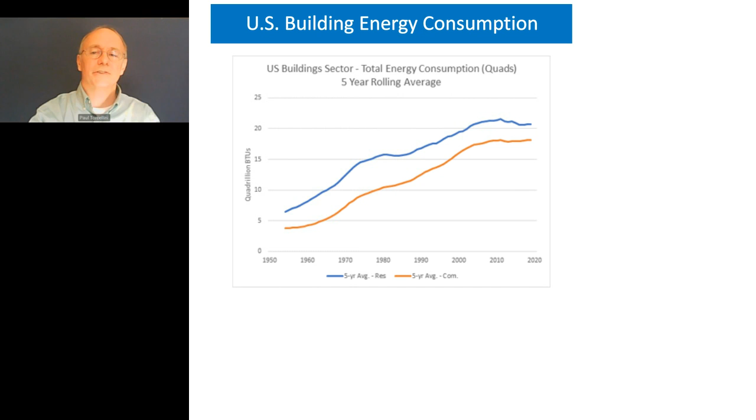On the screen now is a graph from EIA showing the trend in how energy consumption is changing. Yes, it's leveled off. It went down for a couple of years, and now the rolling average, it's hard to tell, but maybe it's going up a little bit. With the events of the last year, we'll probably see a decrease, especially on the commercial side, going into next year. But whether it's going up or down, the point is it's still a lot of energy, and it's not a strong downward signal. So we're building buildings at about the same rate that we're saving that energy.

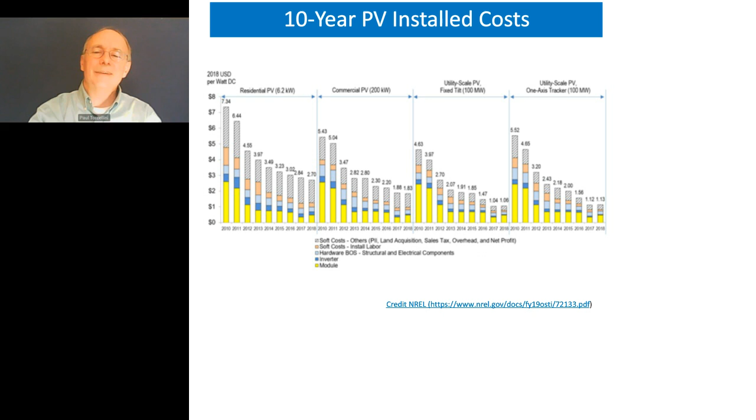Another thing that has changed dramatically is the cost of photovoltaics as installed values. On screen here are different costs for residential, commercial, and utility-scale PV. You can see a dramatic decrease, something like 25 to 30% of the cost today compared with 10 years ago. That's really changing the landscape around renewable resources available to buildings. When I started thinking about this 25 or so years ago, putting renewables on a building was cost prohibitive. A few people did it, especially if grid independent, but really you couldn't afford to. Today it's readily available, and that market is increasing pretty dramatically.

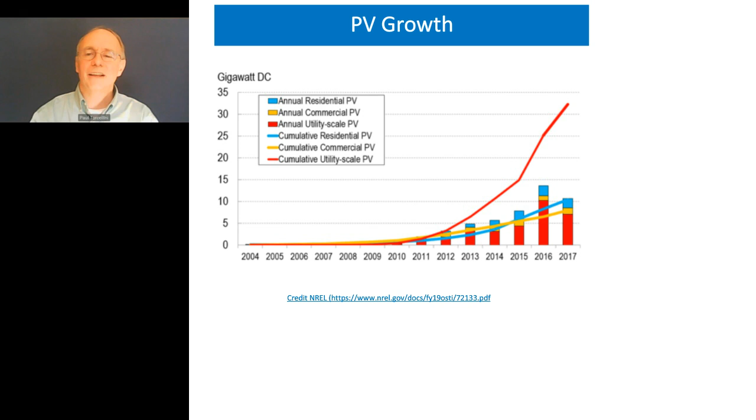This kind of hockey stick curve shows that growth, especially on the utility scale, but the growth is pretty good on the residential and commercial scales as well.

A couple other things to think about in terms of how buildings and the grid interrelate: the utility grid has been around for a long time, not quite as long as buildings, but has certainly been designed around meeting the loads of those buildings. Again, 70% of electricity today is going into buildings. And yet that capacity factor of the grid is decreasing, so there's less alignment between the load and existing generation compared with when we actually need that building.

We're seeing that especially in the late afternoons. I'm sure there are other sessions talking about the grid shape and how it's responding, but if you end up with a late afternoon grid peak, you're looking at how to meet that. A lot of times it's been with some kind of gas turbine or gas technology to meet that afternoon peak, or we need to really think about mass amounts of storage to meet that.

Backing up a little bit, when we talk about energy and measure it, energy is one of the few things we can readily measure at the building boundary, but it's long been a surrogate for environmental impact. That environmental impact focus has shifted a bit with time. Initially it was a lot about water and air quality, mercury, sulfur, nuclear waste, habitat destruction. More recently, a lot of discussion around carbon emissions. All these things get tied back to energy because that's really the only thing we can measure as it's crossing the boundary.

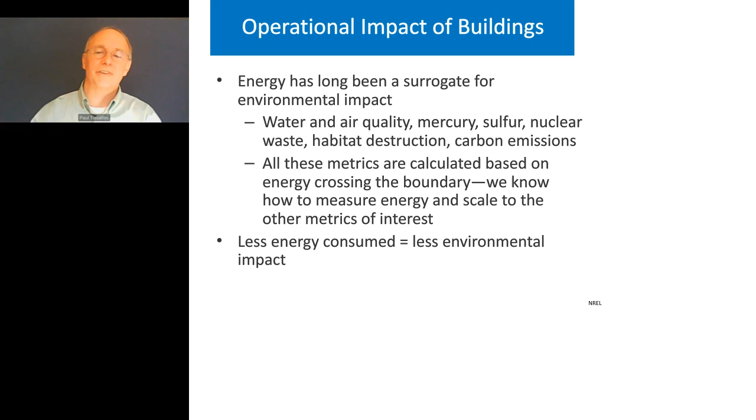So kind of the overall premise, which has been understood over long periods of time, is that if we consume less energy, then there is less impact on all of these metrics. So really the objective here is: how do we reduce that impact?

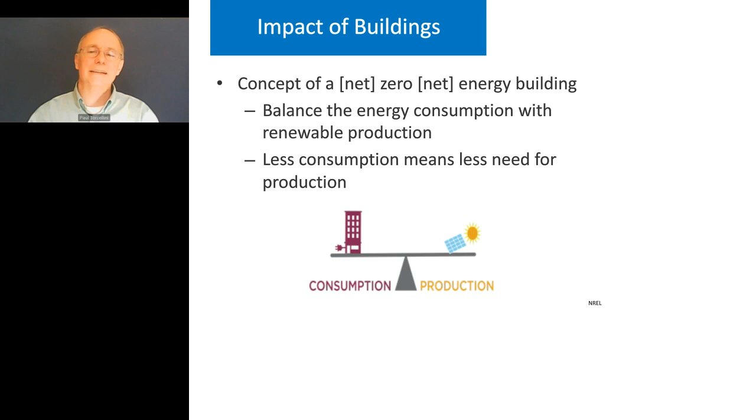That fundamentally is the concept of — and I stuck a couple different nets in here, if you want to have an entire informal session, we could probably have one just on where does the word 'net' go, or does it go at all — but the concept of zero net energy buildings is really about balancing consumption with production. If we have less consumption, that really means we can make that balance easier with less production.

Early on, when we were talking about zero energy buildings, we did a feasibility study looking at 50% energy savings and 50% roof coverage, and there was enough roof area to power all the commercial buildings at this level.

We've also looked at numbers of examples, especially of earlier generation zero energy buildings, looking at data and what that balance looked like, realizing solar isn't generated for large periods of the day. In reality, to get to zero, even on a cloudy day, there's probably some time where you have to export that energy back to the grid. The grid has, for a long time, been a pretty effective mechanism for taking that energy and redistributing it.

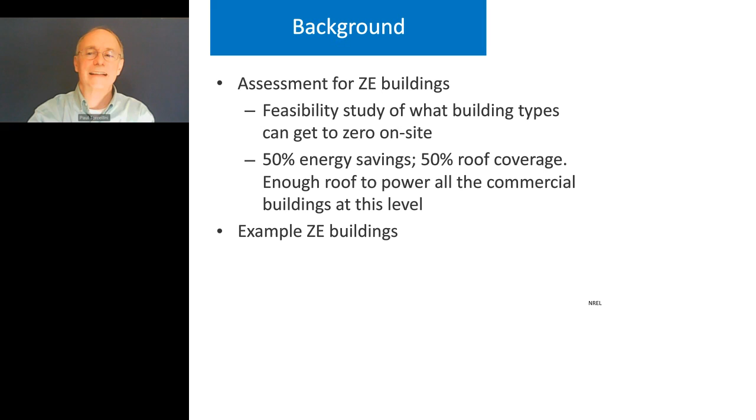I mentioned we had an original framework, which we've dubbed in this paper version 1.0. It was a method for determining what zero was and some of those boundaries. We could talk about the building itself, the site, a district or group of buildings, maybe a city block. Campuses became popular boundary points, and even portfolios—if I own a number of retail stores, I can put those together and talk about them as a group.

We can also talk about metrics—site energy or source energy, energy cost, emissions. After site energy, a lot of these other things end up being some kind of scaling factor. We also looked at classification based on the sourcing of renewables in that original paper, and the ability to determine if a building was zero in an easy sense because we had utility bills. One important thing we've heard over time is that people want to know if they've achieved that end result and want some control on how to measure that.

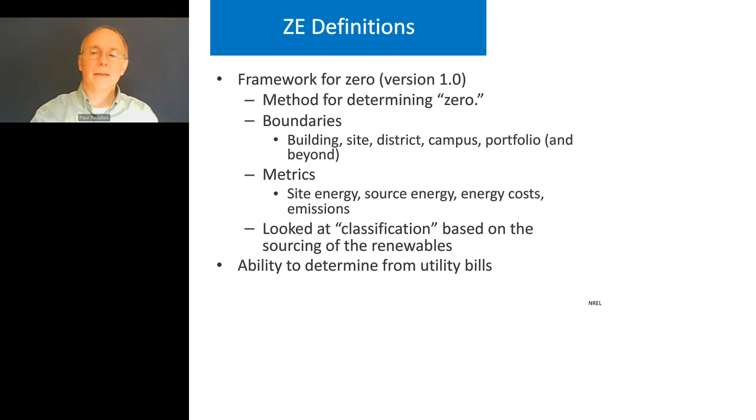But there are clearly some things missing here, including alignment with renewable resources and the ability to use storage—realizing storage, especially at the building level, is somewhat of an energy loser from the pure metric of measuring energy at the site, because the round trip efficiency is not perfect for most storage. But there's also now this advent of exporting to electric vehicles.

And not only exporting, but potentially importing from those electric vehicles. With the large amount of off-site renewables, we need to think about how that has value back to buildings, as well as on-site renewables. So one of the things we established in this paper is, what is the ultimate end goal here? We basically said, if I can get to 100% renewables 100% of the time, does that really represent where we ultimately want to be?

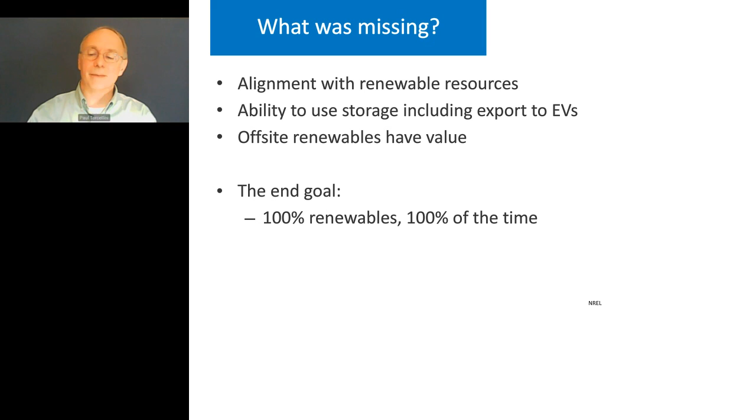In order to do that, energy efficiency has a very central role in making that happen. It has a very high value to the utility grid, a high value to building owners, and can be deployed 24/7 in a lot of cases. So that's an important piece of continuing our discussion about zero energy buildings.

And then there's also this continued ability to evaluate a building with simple data. So we might want to talk about minimizing the impact of externalities in the metrics. There are two pieces there: what does that evaluation look like, and can I still evaluate the building easily? Then, can I minimize the impact of externalities on those metrics?

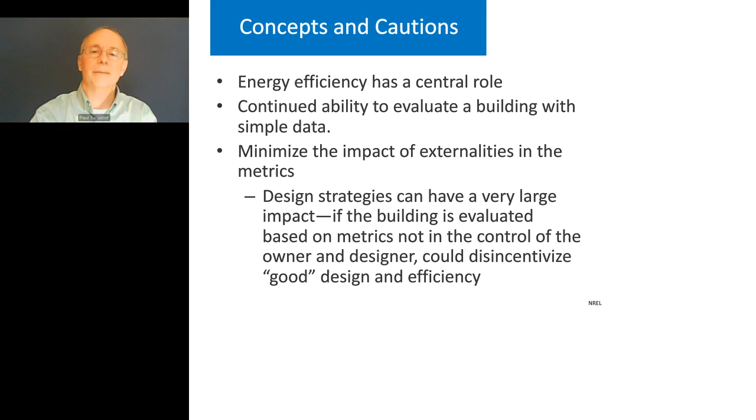Design strategies can have a very large impact if the building is based on metrics that are out of the control of the building designer. If you design a building and realize your dependency on being zero or not is completely external to the building, you might not be incentivized to carry on good design and maintain that level of efficiency. So as we talked about the concept development here, we're really looking at energy flows as they cross the boundary.

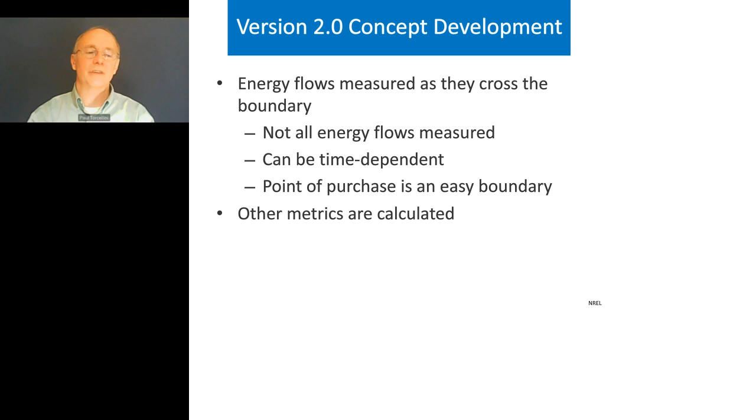Interestingly, not all energy flows get measured at the end of the day—they can be time dependent. In reality, we're probably only measuring energy flows hooked up to some kind of utility infrastructure, not every energy flow. So the point of purchase is still an easy boundary point and a central focus on what we're going to measure and when. From that, all other metrics are calculated. So looking at the boundaries, that point of metering, there's a clear building or a portion of the building.

You might be looking at a store in a shopping center, which is a portion of a building, or communities of buildings. You may even look at it in a larger sense—towns, cities, states, maybe even utility balancing regions—continuing with the portfolios, but also maintaining some span of control of a project. We want owners and design teams to be key points of engagement for being responsible for how buildings function and operate, and their role in reducing our energy and environmental impacts.

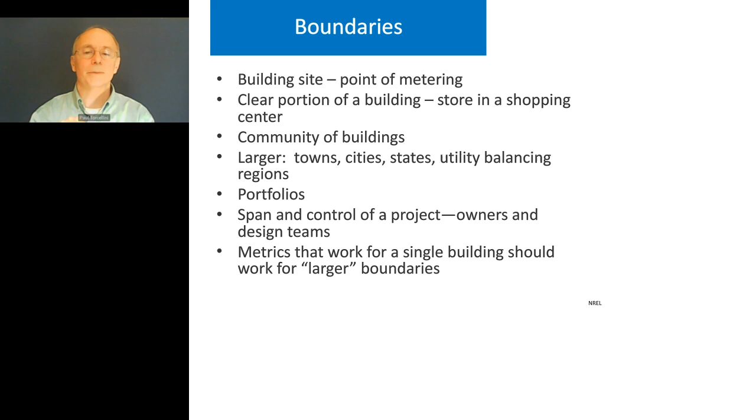It's interesting, whether we're talking about a single building or lots of buildings put together, developing metrics that work for single buildings should also work for these larger boundaries, these multiple sets of buildings.

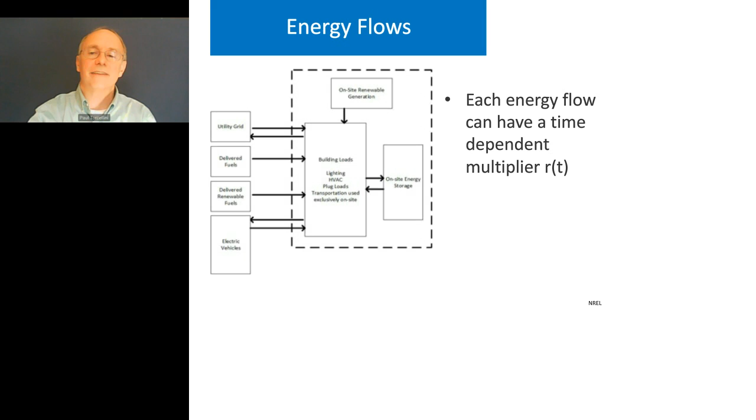So I've mentioned the energy flows. This is a graphic right out of the paper that tries to quantify some of the directionality and flows of that. Notice that on-site renewables is really part of the building, inside that boundary, as well as the storage elements that are there. One of the things that is changing is the time valuation of when that energy is used, so you can end up with a multiplier that's a function of time, not just aggregating up those energy flows.

So looking at a couple of metrics related to this that help frame and think about this alignment and maintaining some of the efficiency goals. One was something we've dubbed the solar use index, which is really a measurement of the percentage of solar energy that is used in the building when it's available.

Often buildings have solar panels on the roof during the day. They can export that energy and then purchase it back at some other time. One of the things is, am I using that energy at the time it's generated? Am I designing my building such that it can use that energy, or even that renewable energy, as it's available on the grid? So you can extend this definition to grid availability of renewable energy.

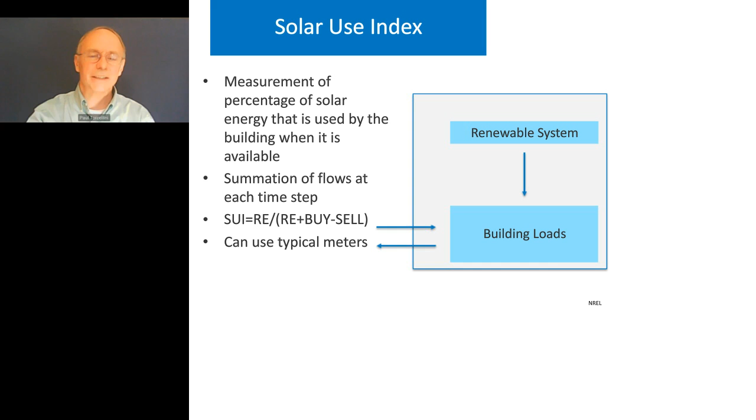One of the nice things about this metric, especially if you're looking at it just inside the building, is that it's very easy to measure, because a typical net meter today already does the integration for you and logs the inflows and outflows. You can combine that with an aggregate monthly renewable energy total and get an integrated value for the percentage of solar energy used instantly in the building.

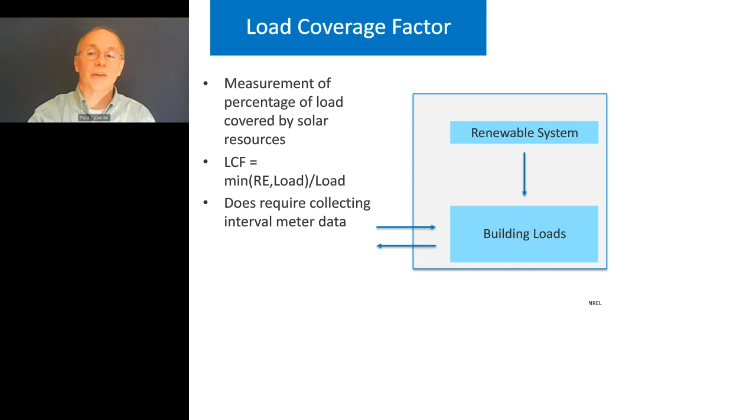The next one is a load coverage factor, a measurement of the percentage of load covered by these solar resources. To do this one, you need some interval meter data, because it's important to know when that renewable energy is generated and how it matches up with what's being bought and sold at any moment in time. Graphically, we can look at these.

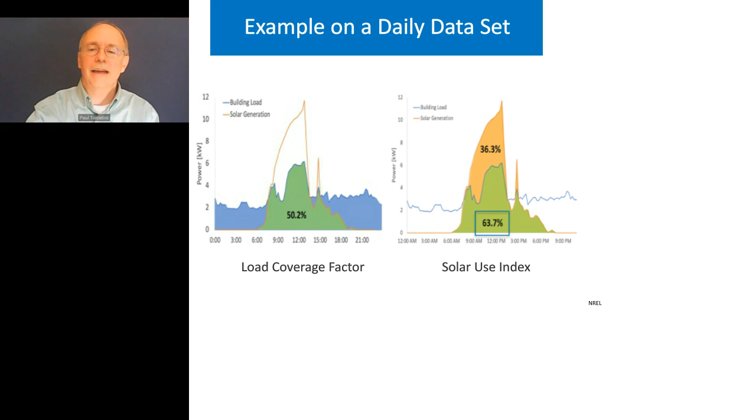That compares to... I realize the labels are actually backwards on this graph. Let me say that again. So 50% of the solar energy is actually used in the building in one case, where in the other case, only 63% is actually used in the building at that moment, or is covering the load at that moment in time.

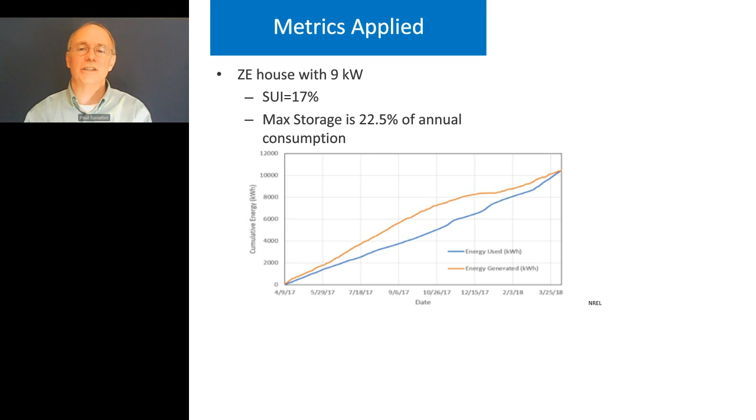So we can apply these metrics to actual examples. For example, you can look at a house—this was actual data from a house with a 9 kilowatt solar panel. Only 17% on an annual basis of the solar energy was actually used in the house. The other 83% was sold back to the grid and then repurchased later. The grid is being used as a storage element in this case, and the maximum storage on an annual basis is actually 22.5% of the annual consumption.

Looking at the load coverage factor, we can say that as we deploy storage in a building, we can increase the amount of load that we can cover with that solar, because of shifting some of that load with storage.

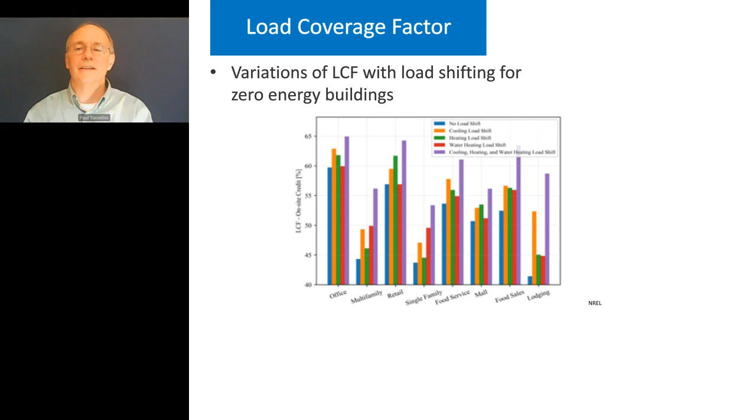And so you can see this analysis with several different building types. And as you know, the increase in storage actually shows that more of that load is covered.

And so just wrapping this up, and there's lots of other details in the paper, the building can really be designed to better align with the renewable resources, both on-site and off-site, striving for 100% renewables 100% of the time.

And then we can look at this expanded definition, the ability to value energy as a function of time. We could talk about increasing the export if the grid can use it, or reducing the loads to account for losses and non-use. So there's various ways that the current formulation looks at valuing that energy.

But ultimately, if we want designers and operators to be an active market player here, they do need some long-term market signals so that they can make effective design decisions.

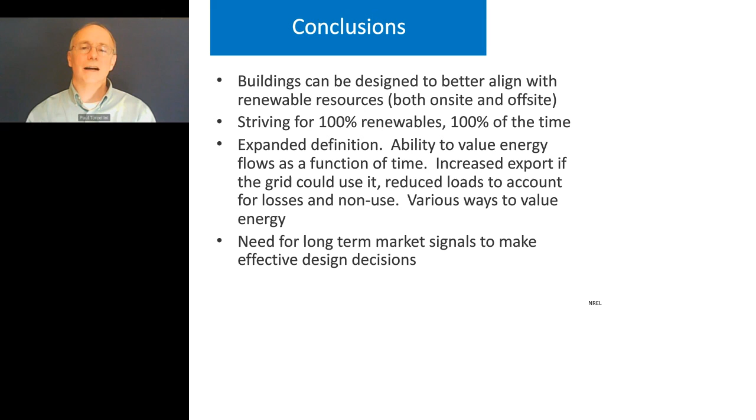And I know some of the rules of thumb that we've talked about are things like have buildings that use more energy between, say, 10 and 2 every day, and a whole lot less energy between 4 and 8 or 9 p.m. every day. And even taking simple steps like that can go a long way in allowing for more renewable penetration, as well as enabling more energy efficiency.

So again, I'd like to acknowledge the different folks at DOE for continuing to support efforts along these ways, along with the co-authors for the paper. And I will end there and turn it back over to you, Smita.

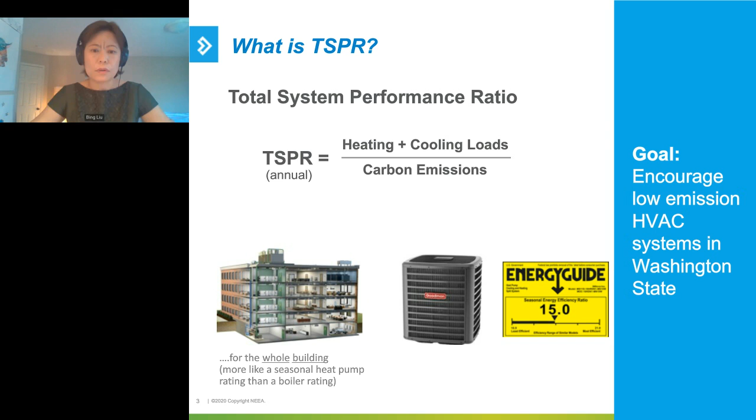And there's no penalty for using a lousy HVAC system, but there's no reward for using a great system type either. So at the end of the day, there's no motivation in the industry to improve system performance or think holistically.

I want to illustrate what I mean by the code structure. On the right side of the graphic, you can see the code structure is currently focused on the component level - what we call the prescriptive path. Depending on what kind of building component you have, there's a set minimum efficiency required for you to meet. This component-level compliance path is the most commonly used for buildings because it's easy to use and simpler to comply with.

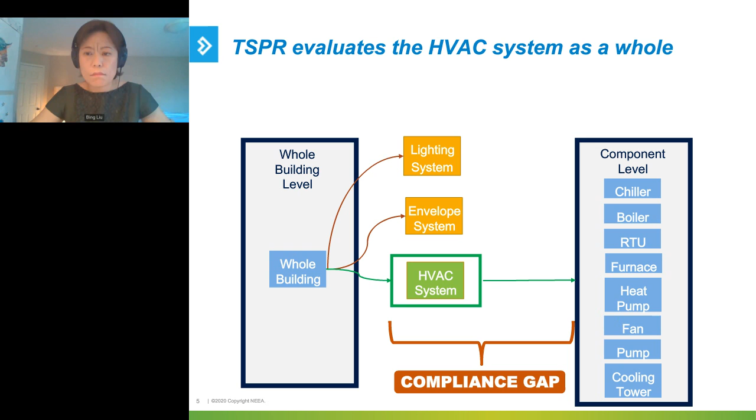When we get into the code language, the TSPR requirement in codes is quite simple. So what I have here is the code requirement. For office, at least currently in Washington codes, they only apply to 4 building types: office, retail, library, and schools. Your designed system's TSPR value should be greater than or equal to the TSPR of your standard reference design.

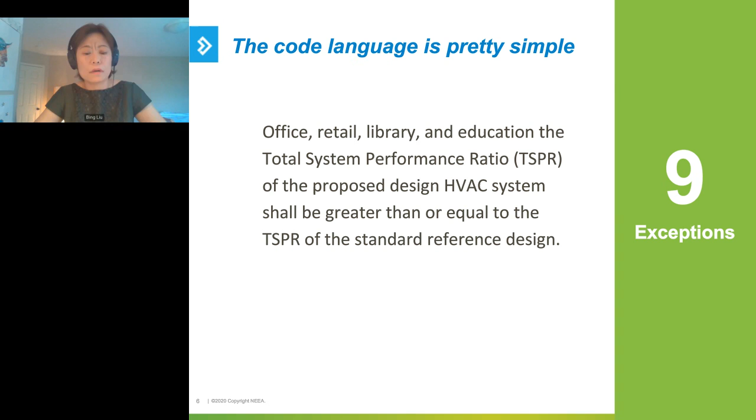The standard reference design is also called the baseline design. There are also exceptions, 9 exceptions laid out in the codes, mainly for smaller sized spaces. If you have less than 5,000 square feet, you don't need to comply with TSPR. Or if you have less commonly used HVAC systems, such as district heating water or chill water, you have exceptions as well. There are some others too, laid out in the codes.

I want to give a quick snapshot of how the baseline system design has been defined in Washington State. For the modeling graphic I'm showing, it's representing small office, library, retail, large office, and school - these are the 4 building types regulated to need a TSPR calculation.

The whole process was pretty long, because it's very hard to define a single set of baselines representing a building type. Our starting point was really using the Northwest Regional Commercial Building Stock Assessment. That gave us the basis in terms of what has been the commonly used HVAC system type in Washington State, with statistically valid survey data from our stock assessment.

We also convened, in addition to the authors, the code stakeholder groups, including designers, engineers, energy modelers, and code officials. I would say there was debate through the whole code adoption process - it's a 2 year process to determine the very details of what the baseline systems should be.

And the baseline system has to meet other prescriptive code requirements of the new commercial codes as well. It's pretty already stringent as a baseline system, because back to the 2015 Washington codes, for the prescriptive paths, you needed to have dedicated outside air systems in your HVAC, which really separates the treatment of outdoor air from the space heating and cooling loads, in combination with energy recovery ventilation, ERV.

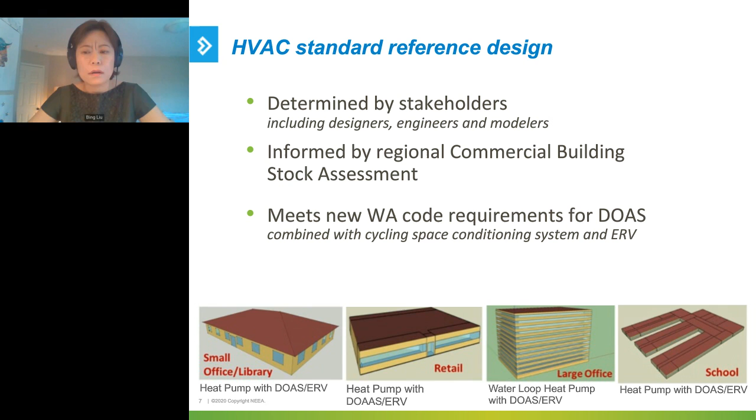I realize in the slides the detailed specs look very small. It's also in our paper. You can also find the detailed baseline system specifications in the new codes book, as part of that appendix. I'm not going to go into detail on that, but the information is available.

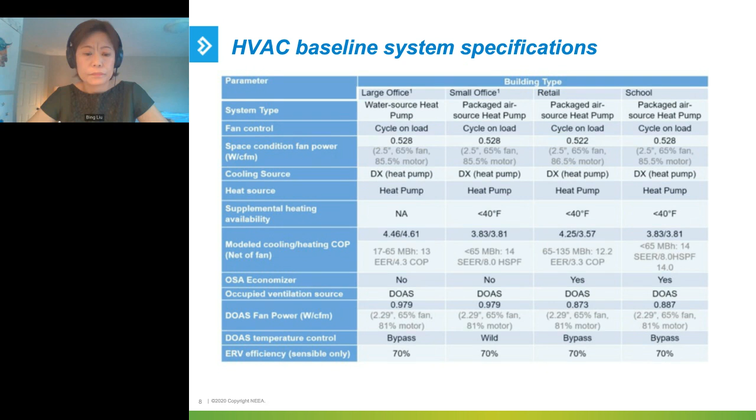Another major change from this metric development, as I mentioned earlier, is what you try to calculate in terms of HVAC system efficiency. You can have multiple ways to calculate it - you can do site energy, source energy, energy cost, and carbon emission.

In order to closely align with the Washington State policy goal in terms of carbon reduction, the Washington State Building Code Council decided, with the recommendation from the Department of Commerce in Washington State, to use carbon emission as part of the calculation of TSPR. What I have here is showing the carbon conversion factors we've used.

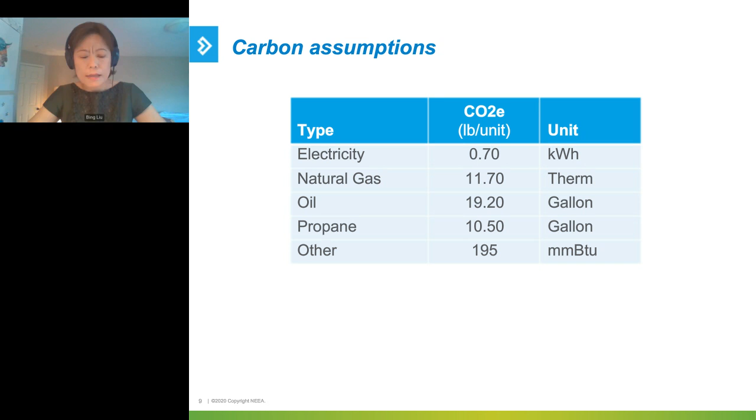That's also a development generated through the whole codes consensus and public engagement process, with quite a debate and balance among the utilities and the stakeholders. So that's at least the conversion factor that's been used as a basis to develop the codes in Washington State.

Because in order to calculate your building loads and the energy and carbon generated from the HVAC system, consumed from HVAC system on these loads, you really need to do the whole building calculation. So we recognized how important it is to provide a convenient and free software tool to provide this kind of compliance tool, to help the market not just accept it but also comply with it.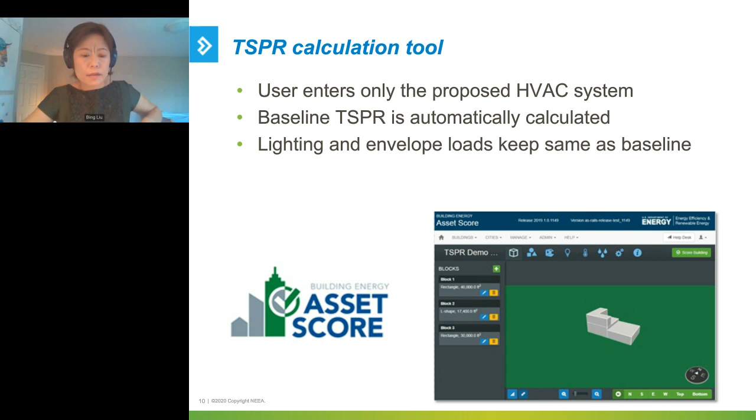So what I've shown here is the tool PNNL has developed, using DOE's Building Energy Asset Score as a platform. The asset score is a simplified tool for assessing building energy efficiency - it's pretty clever and very easy to use. The tool itself has a very simplified way to enter the geometry, with quick intuitive clicks for you to just describe your proposed HVAC systems, and the tool will automatically generate the baseline TSPR and provide output and a report to the user.

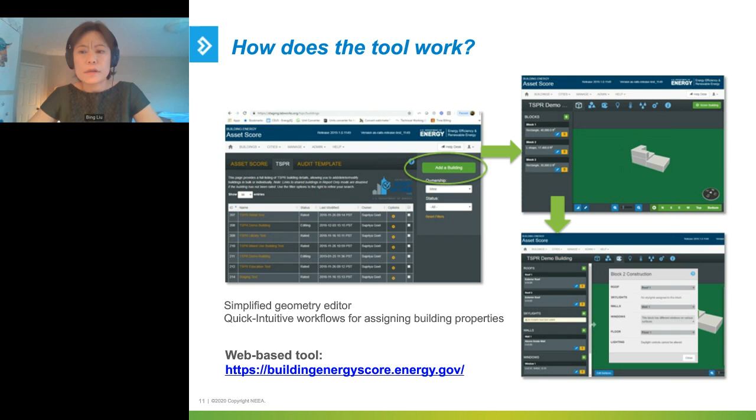I'll provide a link here. Everyone is free to use it, and we also provide technical support and trainings along with this compliance tool.

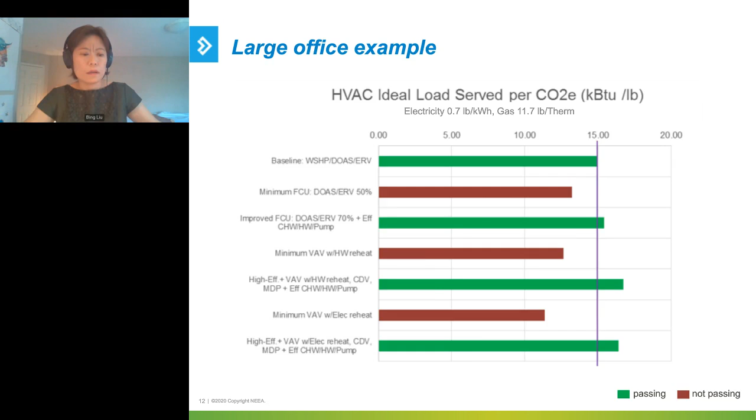We understand, since this is a novel idea and first of its kind in the code world, we needed to really think through how to prepare the market for this new requirement. So UW IDL and NEEA have been working on this for the last part of last year to develop the pilot project to test the TSPR, right after TSPR was adopted and before it's effective. So this is kind of a sweet time for us to really prepare the market on that.

The objective of this pilot was really to collect feedback from design professionals on the usability of the TSPR tool through real world projects, including their experience in terms of receiving the trainings and the implementations, and also the report.

So the design of the pilot includes three main elements: outreach and engagement to the design communities, and training, testing, evaluation, and feedback.

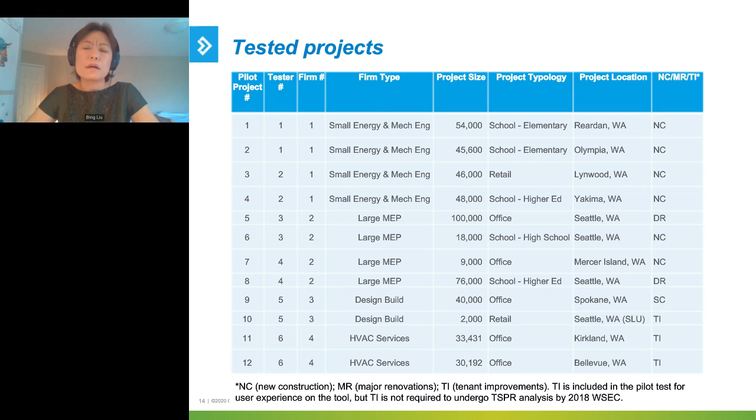What we have is a broader range - we were able to recruit 12 real-world projects, covering different building types, different sizes of building, with a focus on smaller buildings for major renovations and new construction. Also testers representing large consulting companies, design build companies, small services, and HVAC services with their different climate and geographic areas in Washington state.

The main takeaway from the pilot project was that it is promising if we move the project closer to the carbon reduction goal and save natural resources. The tool itself is easy to use. Its reporting takes no more than 2 to 10 hours to finish the whole project, so compared to whole building simulations, it's about 10% of the time. And it's a very valuable code compliance tool.

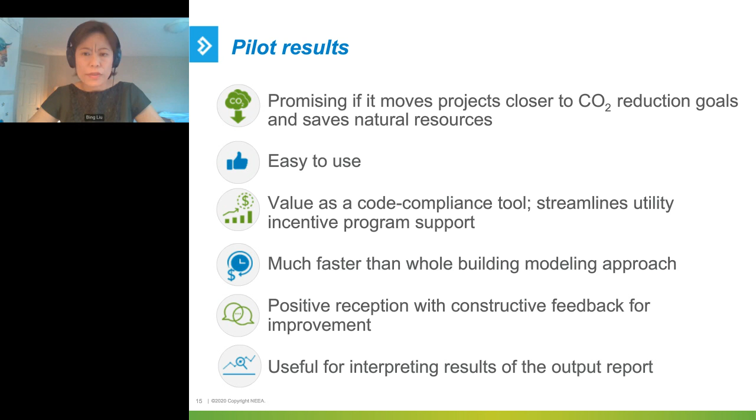We also received a lot of constructive feedback in terms of how to improve future trainings and how to improve the output report, particularly if the project is not passing the TSPR - what kind of suggestions the tool can provide to help designers rethink their system design.

So after that, PNNL and IDL developed a lot of customer training. I'm not going to talk about all the detailed training, but just in the past summer, we've had 500 professionals sign up for just 2 sessions of the training. So it's quite popular to receive that.

I want to share a little bit about how the tool helps bridge the gap for utilities. If you're familiar with utility incentive programs, we commonly see 2 types of incentives. One is a measure level incentive, which is relatively straightforward, normally used for simple buildings, but with limitations since it's based on usage. With codes continuing to increase in stringency, there's less headroom to provide this kind of incentive as measure-based levels get less and less cost effective from a utility perspective.

And there's a custom project normally used for large buildings that can achieve deeper savings with a lot of flexibility, but it's pretty costly for utilities to operate and for customers to use as well. So TSPR really bridges this gap - this is a very simple metric. Utilities, the codes can set up at 100% TSPR level, and utilities can dial that up to 10% more, 25% more, even 50% more as a utility incentive.

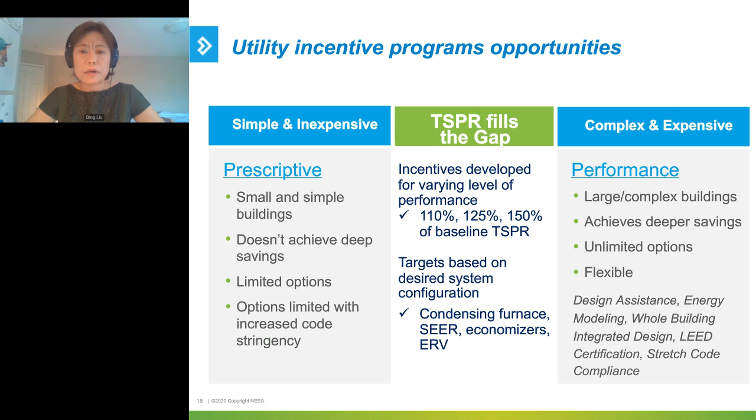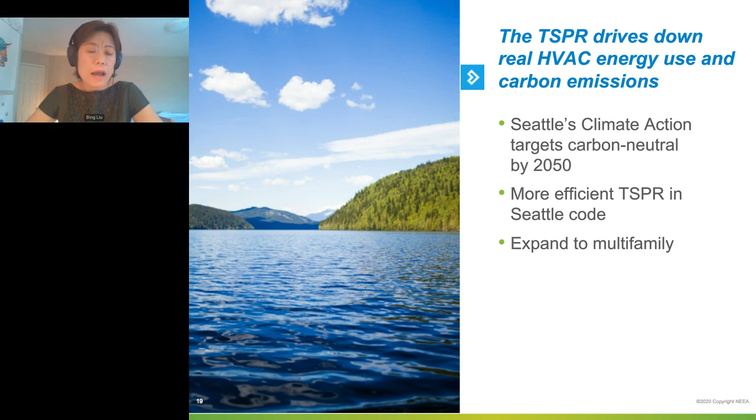And also, because the goal is really set up by their carbon, it can directly track the contribution in terms of carbon, such as City of Seattle, which is considering adopting more aggressive TSPRs in their new Seattle commercial codes. You can also expand from the 4 building types in Washington codes to other building types, such as in Seattle, where they've expanded to multifamily.

So in conclusion, the TSPR really rewards integrated and efficient system design, and the free calculation tools offered can help streamline the connection between code compliance and utility incentives, reducing the utility's overhead for program operators who offer this kind of measure.

And secondly, because of well-established methodologies, the TSPR metric can easily be tailored to your jurisdiction. You can pick your own baseline system, pick different metrics, and easily apply it to a Beyond Code program.

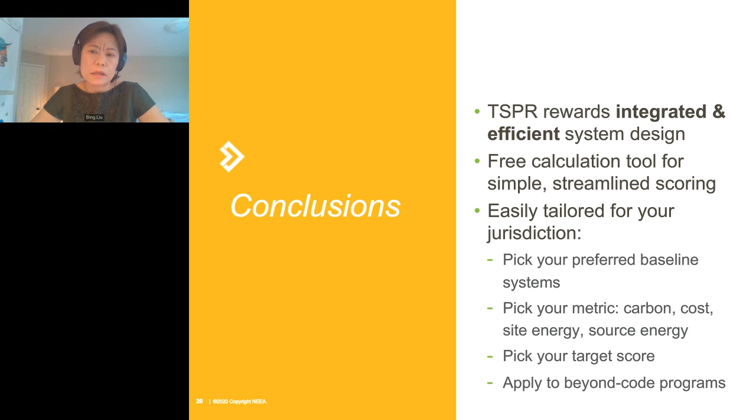Given that, I'll turn it back to Smita. All right, thank you, Bing.

We'll move on to our third presenter for the day. As you've seen, we've evolved in this session from starting at the building level, then the technology level, all in the vein of net zero. We're no longer limiting ourselves to energy, but looking more at grid interaction and decarbonization. Keeping with that theme, our next presenter, Ellen Franconi, is going to talk about the grid interactive aspect of buildings.

Ellen Franconi is a building systems engineer and senior research engineer at Pacific Northwest National Lab. Ellen supports DOE's efforts to advance model building energy codes as part of her work within PNNL's Buildings and Connected Systems program. Her research informs the consideration of grid interactive, net zero, and resilient buildings in model energy codes. With that, I'll hand it over to you, Ellen.

Great, thanks Smita. Hello everybody. I'll be talking about some research I've done with my PNNL colleagues in support of DOE's Building Energy Codes program and their efforts to advance national model energy codes.

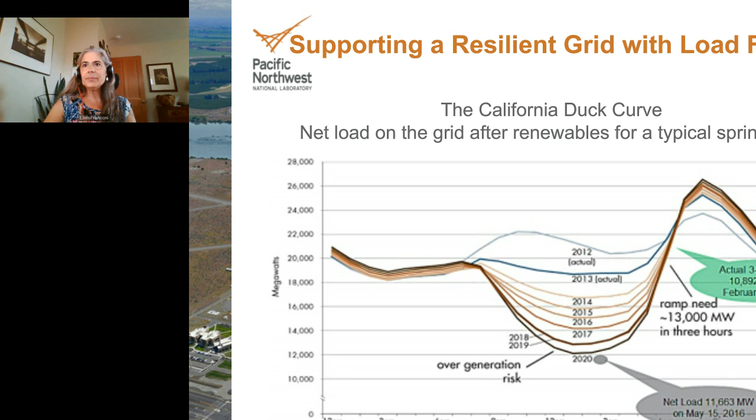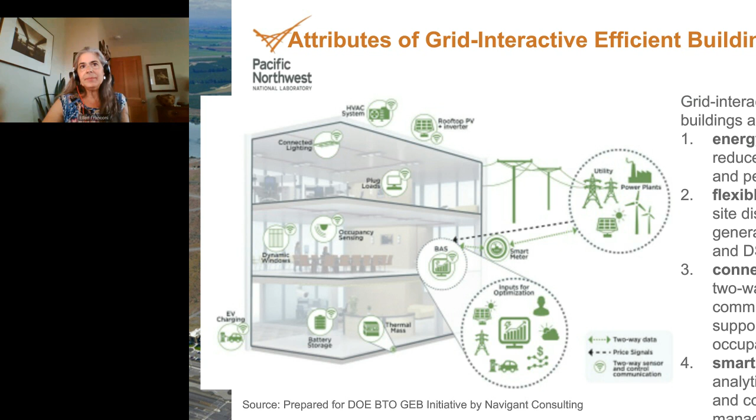So one challenge about considering GEB in codes is valuing it. Historically, in code development, when you're trying to introduce a new code change proposal, such as a new efficiency requirement that needs to demonstrate cost effectiveness, that analysis is based on a flat electricity rate in terms of dollar per kWh cost. But if you try to do any load shifting or flexibility, it won't demonstrate savings unless it's impacting that flat rate.

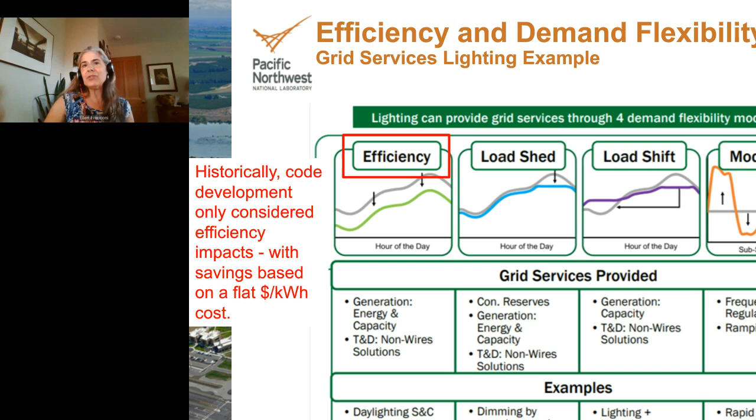So this is an overall challenge, and we need to do a better job of understanding how rates change and at what rate they change. As shown in this graphic, from the DOE BTO reports, this is specifically for lighting, but it shows how energy efficiency measures can affect efficiency, but they can also have demand flexibility aspects, or be targeted directly at demand flexibility in terms of shedding and shifting load. And if they can react at a very fast time scale, they can also do load modulation, which can mostly affect power quality. Besides just considering flat energy cost reduction, there is much more value that these demand flexibility measures can offer to the building owner and to the grid.

So as part of our work in building energy codes and understanding the existing code development process, we wanted to get a better sense for how prevalent time of use rates are in the US and how important it is to consider them. So we drew on some research.

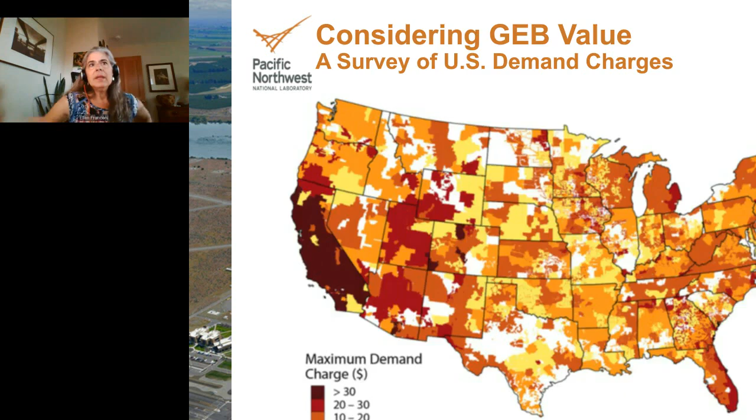So what we did was we drew on our building code, or model code prototype buildings, which have roots in previous work that Paul has done with the DOE prototype buildings. But these prototypes have veered off, they're a little bit different. They actually include all requirements affecting energy that are specified in code, so they're maintained and very detailed.

We also looked at different rates. We looked at the average blended rate, which is what historically has been used in code development. We also used that OpenEI data underlying the NREL map to create a representative US time of use rate. In addition, we used an actual rate, the Con Ed New York City time of use rate, to characterize a more aggressive rate. Then we looked at different energy efficiency and demand flexibility measures to understand how important that is and what we can learn from analyzing it.

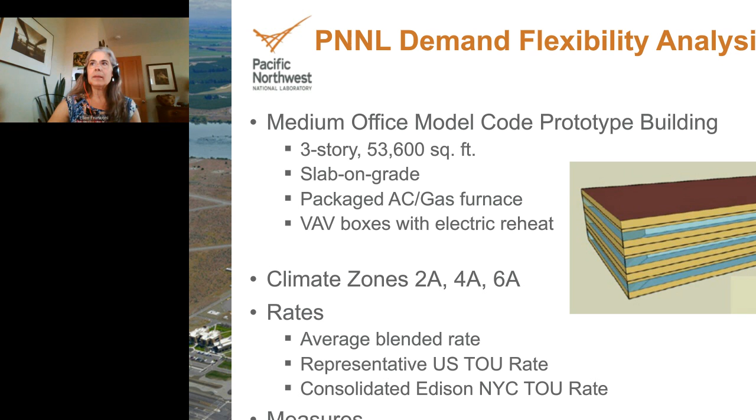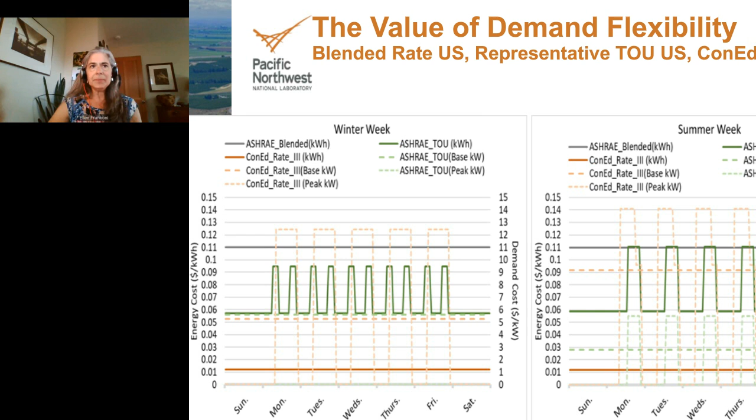So in addition to those 3 different rates, we looked at a variety of efficiency measures. We classified them in 3 categories. One is standard efficiency, and this included looking at window solar heat gain coefficient, improving it, decreasing it, and also improving the AC unit cooling efficiency.

In terms of demand flexibility, a lot of these were load shedding or load shifting measures with controls. Since we were using time of use rates, we knew when the time of use rate period could be, so these could effectively be pre-programmed within the building automation system. So we had a lighting load shed during the peak demand period. That's demand.

In summertime, based on that ASHRAE time of use rate, we also had some pre-cooling, preheating, and a little additional outside air ventilation rate in non-peak times to carry us through the peak times. And we did evaluate one distributed energy resource measure, which would be on-site battery storage.

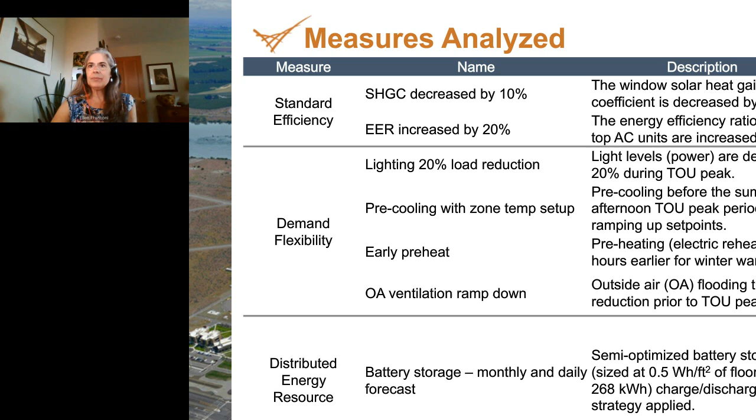It's hard to do that when you're trying to characterize a measure. Historically, we'd characterize it, we'd apply it across climate zones, we'd apply it to different building types even. But you really have to take a much more customized analysis and see what's happening at the load shape level.

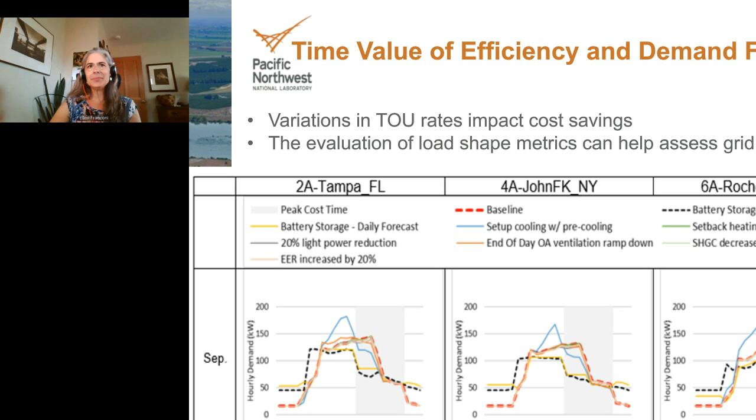And also, we saw in one of these measures, this blue one, the setup cooling with pre-cooling, we really peaked out beforehand in trying to avoid a peak in the peak demand period, and this didn't always show good results. So I just wanted to point that out.